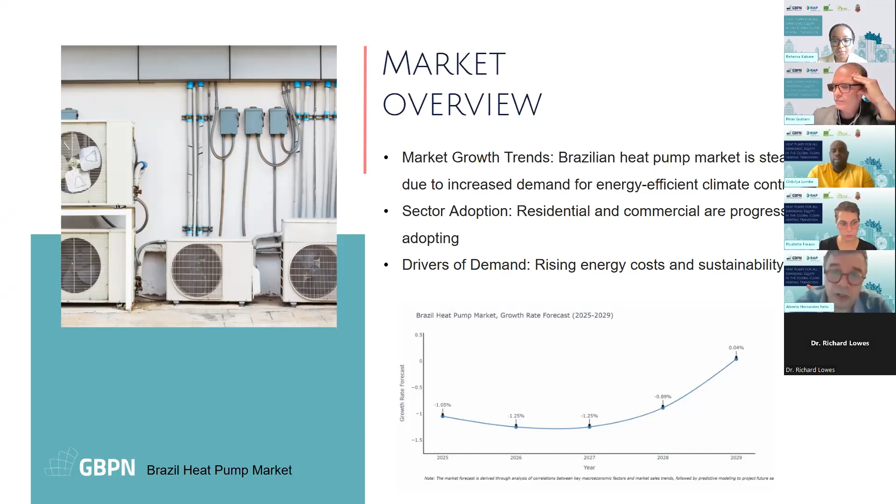We have some financial support that provides interest in applying this kind of technology, especially for energy efficiency. We have low interest loans under a law that makes a program for acceleration of energy transition, started in 2025. Also based on this program, we have some grants and funding programs, which we call green funds, that provide an economic basis for the implementation of energy efficient solutions.

We have some standards being established to incentivize the adoption of heat pumps, especially for water heating. We have a very short history on sustainable certifications here in Brazil—LEED certification is one of the most popular, but we also have an energy efficiency label from the government. So this drive toward more sustainable and efficient buildings is more and more a concern here in Brazil.

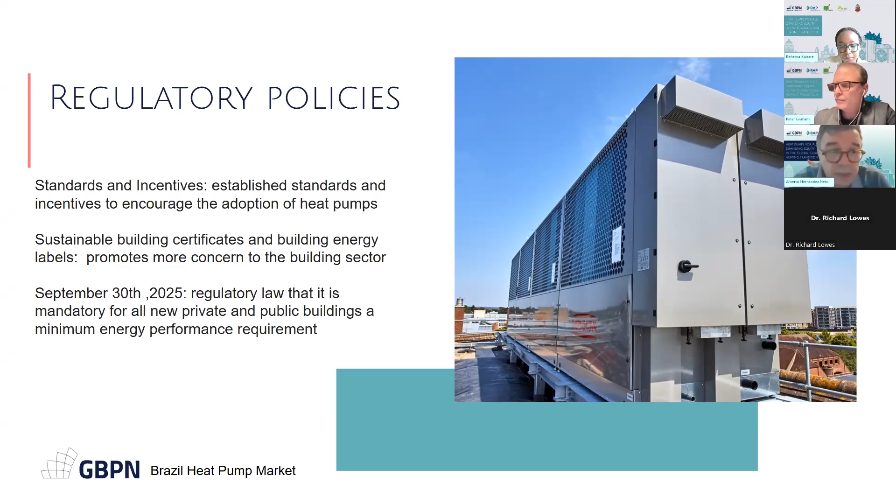As I said, energy labeling is more and more important. We already have energy labeling for equipment—refrigerators, fridges, heat pumps, and also air conditioning. We have performance standards that set minimum requirements for that, and we're also working on education campaigns for consumers, to inform them about the benefits and use of higher energy efficiency equipment. So with a joint force of these laws and campaigns, we expect a more significant increase in the heat pump market in Brazil in the next few years.

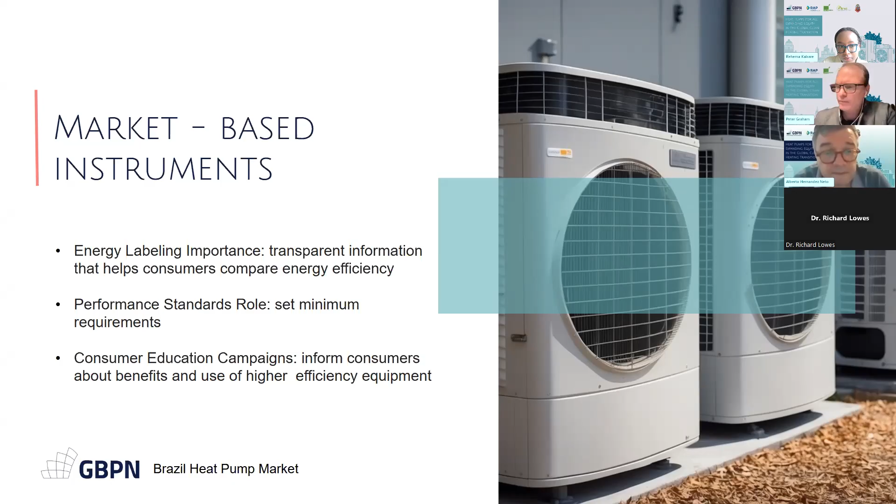So what are the challenges? Especially for residential buildings, the high initial costs here in Brazil is something that we have to deal with.

Still, we import a lot of parts and some equipment, so this is an issue we have to address. We have limited technical expertise, and we lack skilled professionals for implementing such solutions in buildings, so we're still looking for policies to improve technical education in our country.

We have some gaps in infrastructure, especially electrical infrastructure. Some cities have a lot of infrastructure, but Brazil is a huge country with differences from north to south, so we have to deal with a lot of heterogeneity in that.

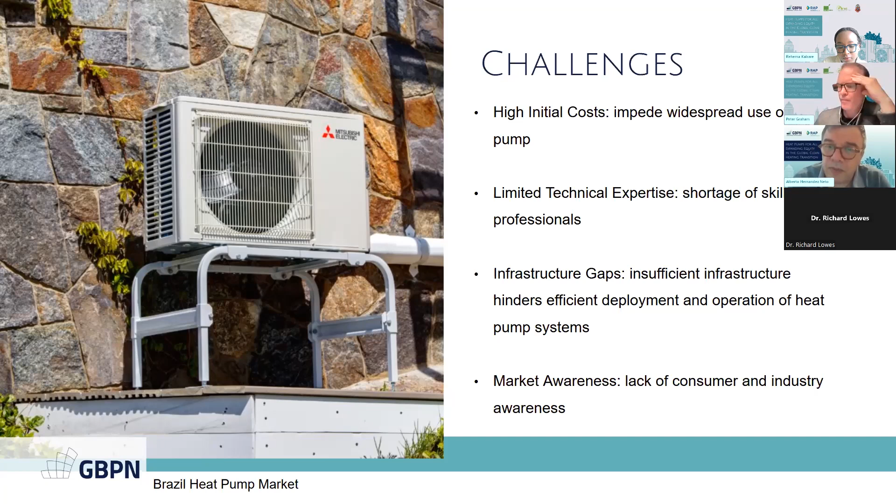And of course, as I said, market awareness. We still have a certain difficulty for the consumer to understand how we can provide, using heat pumps, how to use that in a better way. Next slide, please.

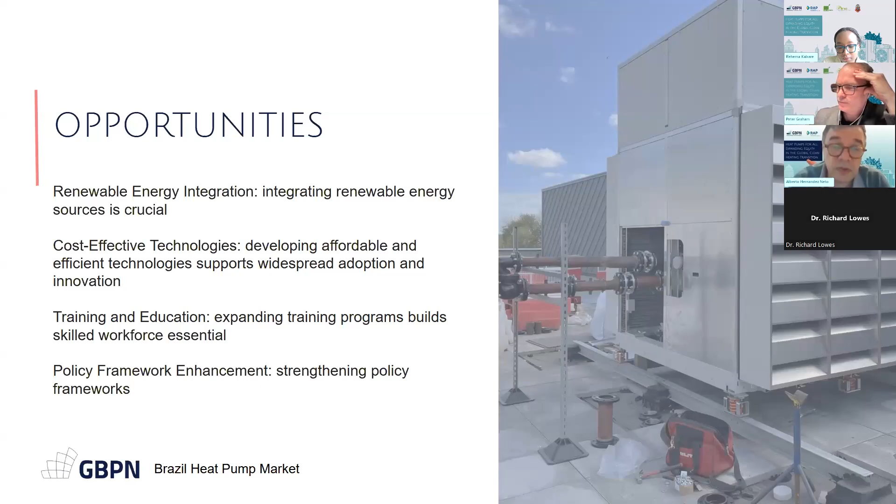So we have, as I said, a lot of opportunities. In Brazil, renewable energy is very important, so we think integrating renewable energy sources is crucial. The idea is to use heat pumps in conjunction with other systems or technologies to make it more cost effective, linking energy demand in a sustainable way.

And of course, we are thinking about innovation and collaboration efforts to overcome some challenges, especially the cost, and on the training of technical people to implement such solutions. So I think I'm done.

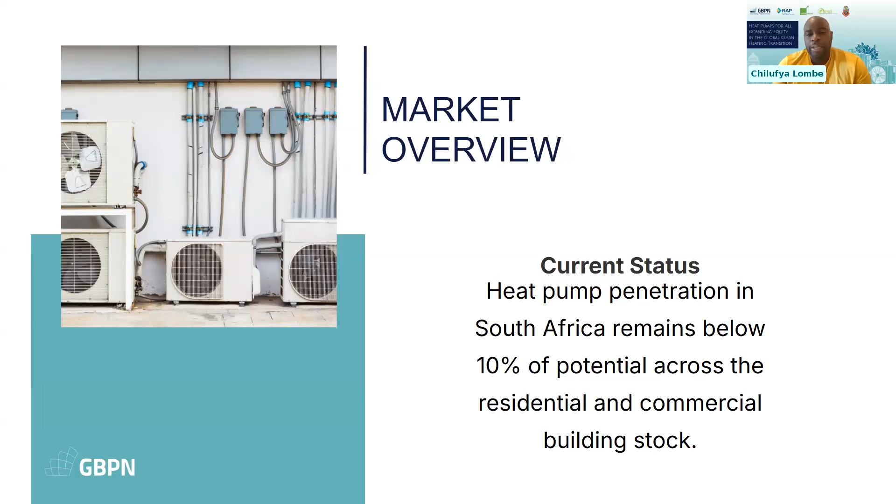In terms of the current status, we know the really useful qualities of heat pumps and how efficient and useful they can be for decarbonization. But South Africa is no different to many emerging markets where there's very low penetration of heat pumps in the market, despite the fact that South Africa has a relatively mature energy efficiency, green building market. Go to the next slide.

In terms of where they should be used, sometimes when we have technical discussions, it's not always clear in our markets where exactly we need to be doing it. In South Africa, residential hot water heating, the bulk of our energy in the residential sector goes to heating hot water. Space heating in commercial buildings is a smaller opportunity because of the climate. I think the real goal or opportunity is in the residential market.

We did a project with the City of Johannesburg a number of years ago looking at the real enablers to having a net zero carbon city, because a number of cities in South Africa have signed up to the C40 challenge that say the cities will be net zero carbon by, I think, 2040. Residential hot water heating was literally the key element — if you could reduce the power or energy needed for residential hot water, you actually make the renewable energy powering your city a lot more of a reality.

So that link between energy efficiency and the ability to make use of renewable energy is very important, and we really see it with the opportunity for heat pumps. If you go to the next slide.

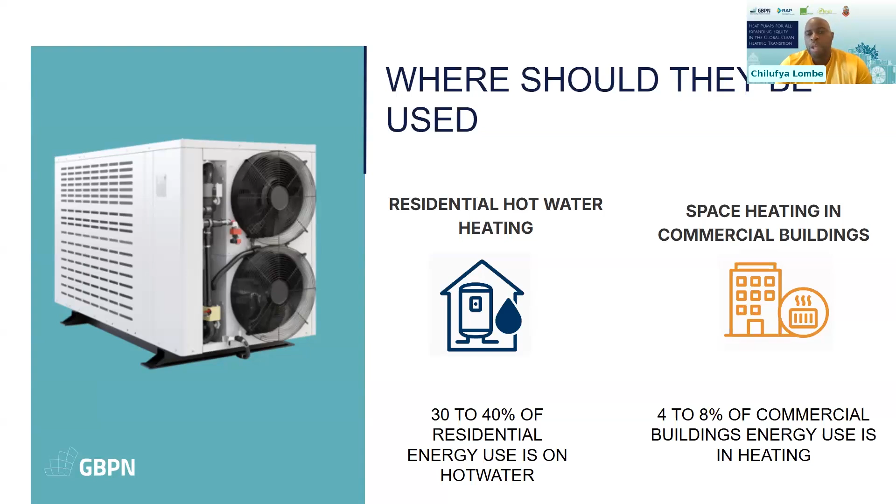So in terms of regulatory policies, South Africa has got really a lot of regulations and codes around energy efficiency and sustainability. But I think it's important to focus on just one, which on paper is supposed to solve at least half of the problem for us.

So there is a law called SANS 10400 XA, which looks at energy efficiency in buildings. This was introduced in 2011, and it basically says that 50% of domestic hot water energy in new buildings should come from essentially non-resistive heating, because the main method of heating hot water in South Africa is resistive heating. I'll show you an example.

There's, however, limited enforcement and understanding of this regulation. What it really tries to say is that the means by which you heat the hot water should be 50% non-resistive. But what has happened in the market is that a lot of people have focused on the source. So you'd put in a resistive heating element to heat your hot water, but then say that 50% of the energy comes from solar panels, which doesn't actually impact the energy use intensity.

This is one of the things that came out of the study, that if we just enforced this law, it would mean that a lot more people would have to actually look at different opportunities. So we often say to our clients that if your house is built after 2011 and it still has the normal standard heating element, then it's technically illegal.

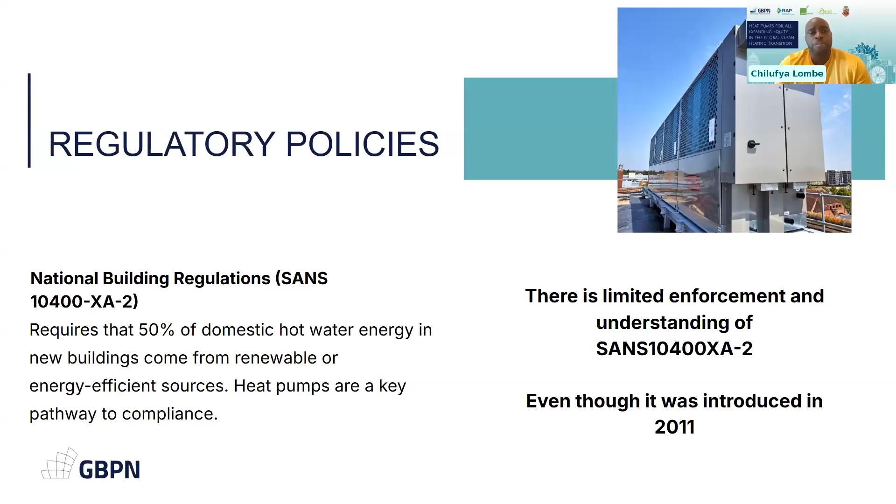In terms of market-based instruments providing financial support, a number of years ago there was quite a lot of rebates around solar water heating, which lasted a couple of years and is no longer there. The main element at the moment that is driving adoption of more energy efficiency is green building certification.

The drivers for that isn't because everybody wants to save the world like most of us, but it's more because there's a lot of funding now available in the country. So IFC, who developed the EDGE certification tool—I think I heard Alberto mention LEED—in a lot of African countries now and emerging markets, EDGE is a certification tool that was developed specifically for the unique conditions in emerging markets.

Because it was developed by IFC, they then linked this funding called the Market Accelerator for Green Construction, or as we like to call it, magic money. Because of that, developers now, if they want access to that funding, need to get EDGE certification. And because it's providing low-cost finance and performance-based incentives for green buildings, that's the one thing we're seeing now that is driving adoption and change within the country.

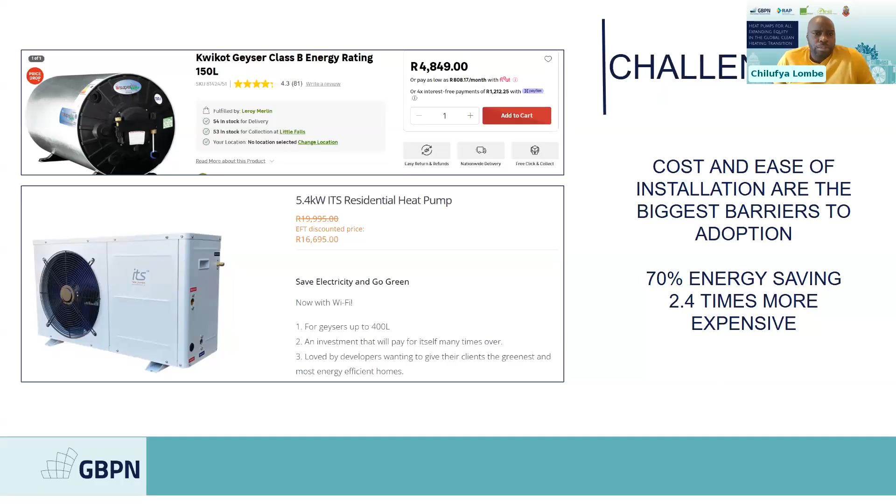Because if you now go to look at solar and heat pump integration, a lot of buildings or clients and even cities in South Africa, everybody wants to be net zero carbon and so on. So if you're reducing energy significantly, you're making it possible to power your building with renewable energy. There's a lot of partnerships and certifications that really promote this.

If your buildings are more efficient - and in South Africa we also have municipal green building policies - all 5 major cities in South Africa have very stringent green building requirements. Technically, any new building coming up in any of these 5 major cities has to be net zero carbon. That's a very, very lofty goal, but then we're still fighting this thing of saying we've got very basic technology for hot water.

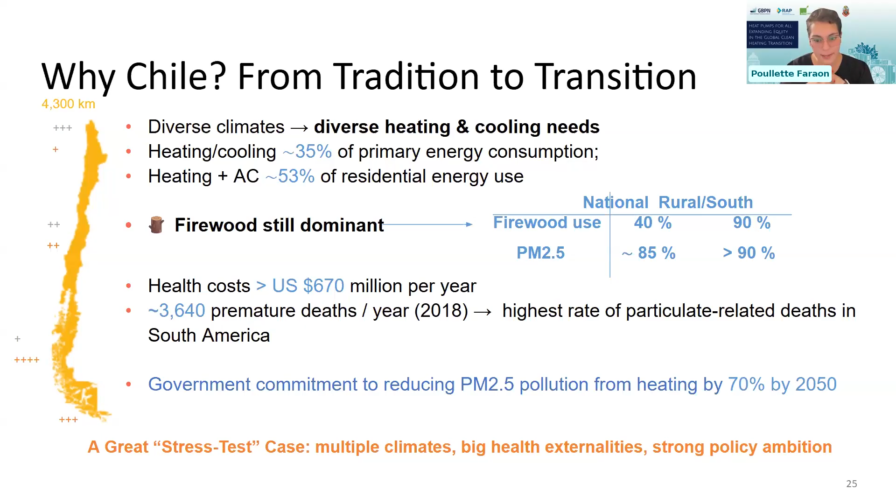In terms of the market overview, Chile is not in incipient stages, but it hasn't grown at the stage they were expecting. The goal is for electrical heating to reach over 56% of houses and 70% of apartments by 2050, becoming the technology of the future for heating and cooling.

The good news is that in Chile, heat pumps are already cost competitive with pellet heaters, which is the most common technology used after firewood. And they can produce between 70 and 76 percent less emissions than other technologies. So the opportunity is huge here.

It has a decent market value of 100 million, and they are expecting steady growth in the years to come due to a lot of policy and regulatory changes. However, still around 70% of households do not have access to heating energy, which is huge in a country like this, and 11% have no access to hot water. So these are, again, very good opportunities for heat pump deployment.

Chile has implemented several things in place in this last decade. The biggest policy, very focused on heating and cooling, is the National Heat and Cold Strategy implemented in 2021. They are aiming to cut greenhouse gas emissions by 65% by 2050, achieve 80% sustainable heating and cooling—mostly meaning electrification—and provide access to more than 75% of households. They also have an energy efficiency law that establishes minimum energy performance standards and labels for HVAC systems.

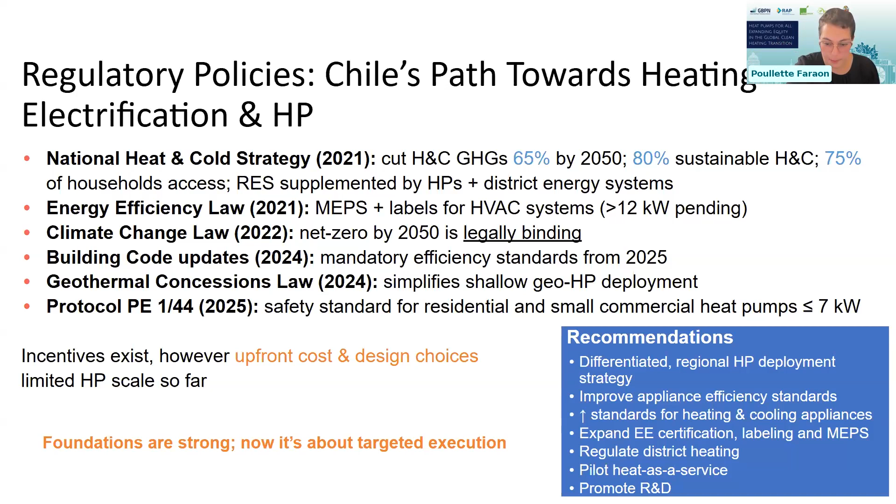However, the upfront costs are still very high, and the design choices of several programs have not been very well targeted, or the results haven't been as expected. From the report that we did, we extracted several recommendations. I'm not going to read all of them, but we can touch on them later.

In terms of financial support as well, Chile has provided a lot of programs, mostly focused on the central and southern regions, which tend to be the most vulnerable cities. For example, they had a heater replacement program that started in 2011.

They had a huge goal of deployment for replacing heaters. However, the technology was not very well focused, and there were a lot of problems. So 10 years after, they only achieved an 18% deployment rate of heater replacement, and most of the ones adopted were pellet technologies. So there was a huge lost opportunity there. No more could be done due to financing difficulties, lack of information, and other things.

They also had a Change Your Heat program that provided between 20-30% tariff discounts for switching to electric heating. Also a winter heating subsidy for vulnerable families, an electricity subsidy for discounts on bills if electric heating was adopted, and other programs including energy efficiency, thermal conditioning, household improvements, etc. There is also a very recent program providing financial support, done by the government and the United Nations program, for industrial heat pump deployment.

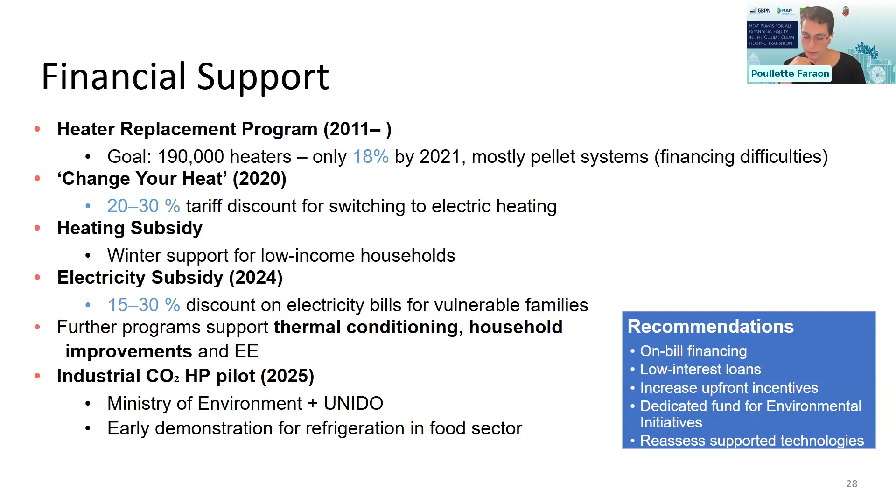And this was only a pilot case for the refrigeration and food sector, but Chile is implementing several things, and they're trying to tackle several aspects in order to implement or foster more electrification in heat pumps. There is also a lot of interesting things that were done in Chile.

Chile was a precursor and at the start of the race, let's say, by implementing carbon tax and green bonds in the region. They were the first country to do it in the region. However, there are a lot of caveats there. They do have a carbon tax, but it is very low. It is only set at $5 per ton of CO2 emissions, which is way lower than the estimated social cost of carbon, which is around 32.5 or something. But the good news is that they are aware they would want to increase this by 35% by 2030.

However, the most pressing barriers in Chile, as in the other jurisdictions that we've seen, is the huge upfront cost. In Chile, a heat pump is over 4 times more expensive than a traditional firewood burner. This is huge. However, the overall lifetime cost of the technology is still cheaper than the other technologies. But this is information that is not shared normally with people, so they just see the upfront cost, and that's too bad.

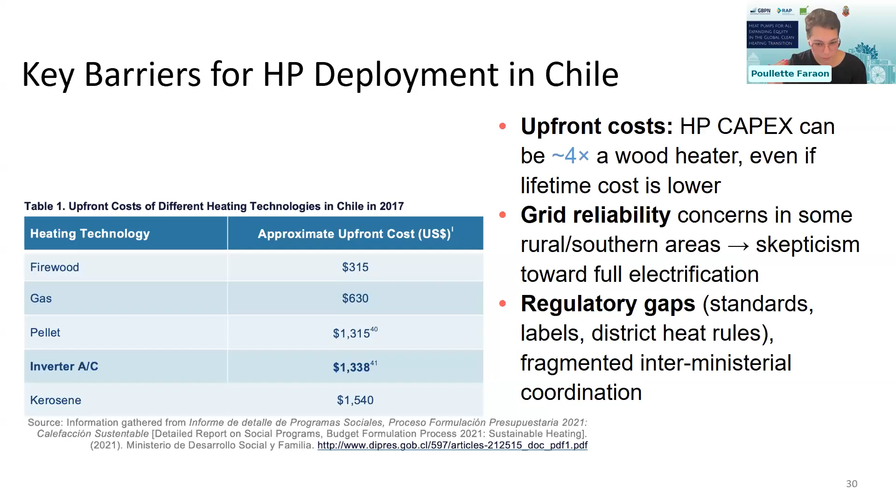Another huge problem is grid reliability. Most of the generation of electricity and the infrastructure is focused in the northern part of the country, and the most vulnerable ones that live in the southern regions, they do not have grid reliability at all. And so this reduces the trust or the confidence into switching into electrification of heating, not only heat pumps, but whatever electrification. So it's a huge cultural disdain of not wanting to willingly shift into other technologies. And there are huge regulatory gaps. Labels, there's a huge room of improvement in there. Next one, please.

And the key recommendations that we found from our report, some of them would be easy to implement: providing on-bill financing mechanisms, for example, to help with these upfront costs, since most beneficiaries would be the consumers that are most vulnerable; provide low-interest loans, as we've seen in other places; foster a differentiated regional rollout, since the country cannot have a national policy of deployment for the whole place because the differences in grid reliability depend on each region. So they could start focusing on very particular regions to start the deployment, raise performance standards and labels and requirements, and of course, increase the cost of carbon and better regulate district heating, and there could be a huge opportunity for heat pumps along with district heating.

And as in the other jurisdictions, just build more communication, more skills, trust, more information, communication between entities as well.

I'm not going to go through this, but if you're curious, we have a very detailed list of recommendations by level of importance, time of implementation that Chile could follow. We highly invite you to read our report. Thank you very much.

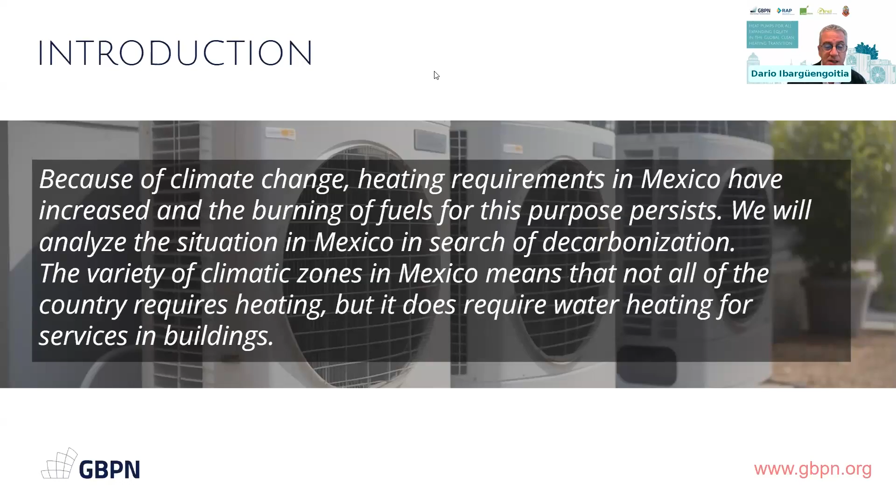Mexico is an interesting market in Latin America. We can think that for the HVAC market, the entire Mexican market is comparable to the market of the state of Texas in the US.

By 2024, this market was $3 billion, with heat pumps being only around 28% of this amount. Due to climate change and promotion of decarbonization of buildings, the heat pump sector is expected to grow more than 8% per year in the coming years, potentially doubling by 2033. This growth is estimated to be driven primarily by the hotel, industrial, and residential sectors, especially with small split systems.

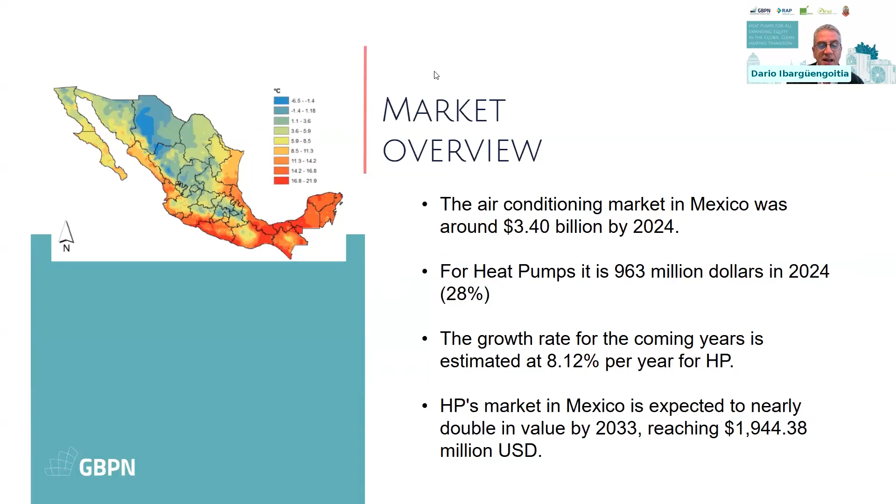Mexico does have certain codes and standards, such as the Mexican Energy Conservation Code for buildings, published in 2016, which is equivalent to the International Energy Conservation Code, and some mandatory standards that establish testing procedures for HVAC equipment efficiency. We are far from having a regulatory framework that applies at the local level in the states and municipalities.

We have official Mexican standards, called NOMs, that attempt to establish minimum efficiencies. These are only for mini-split equipment as well as self-contained equipment. They only cover up to 5-ton capacity, and the equipment efficiency tests only consider cooling mode.

It is important to note that some air conditioning norms have specifically excluded certain types of heat pumps. For example, NOM 23 excludes water-based heat pumps from its scope.

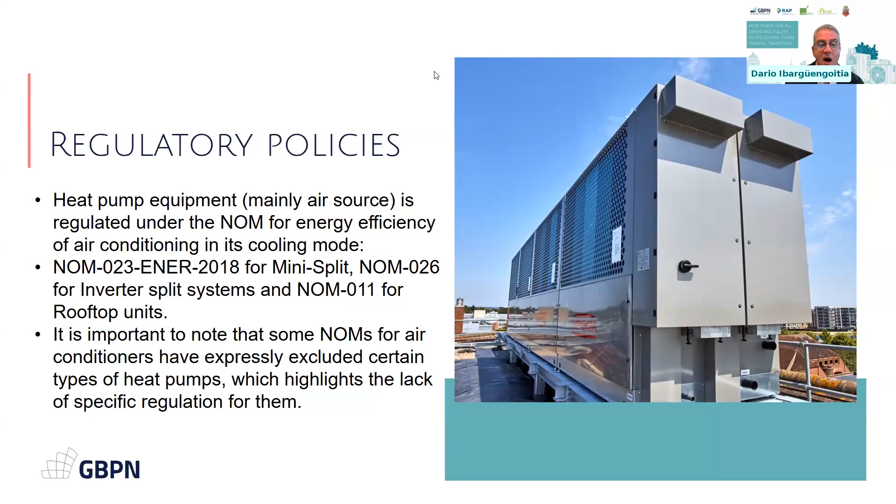Depending on the building sector, we can find some government programs to support financing, mainly indirectly, for the acquisition of more efficient equipment, including heat pumps, but nothing is directly considered for this technology.

There is also the Cooling Action Plan in Mexico, promoted by Semarnat, the Ministry of Environment and Natural Resources, to maximize the benefit of energy efficiency in refrigeration and air conditioning equipment, and promote low global warming potential alternatives. Heat pumps are key to achieving these goals.

Institutions like the National Institute of Electricity and Clean Energy have worked to promote technologies like geothermal heat pumps through demonstration systems. I was just commissioned to work on a specific project to replace the HVAC equipment in a government laboratory building, eliminating fuel combustion for heating.

For the challenge of massive implementation of heat pumps in Mexico, the HVAC industry faces a series of interrelated challenges, covering financial, technical, regulatory, and cultural aspects. The main challenges are economic and financial barriers: the high initial cost and lack of specific incentives.

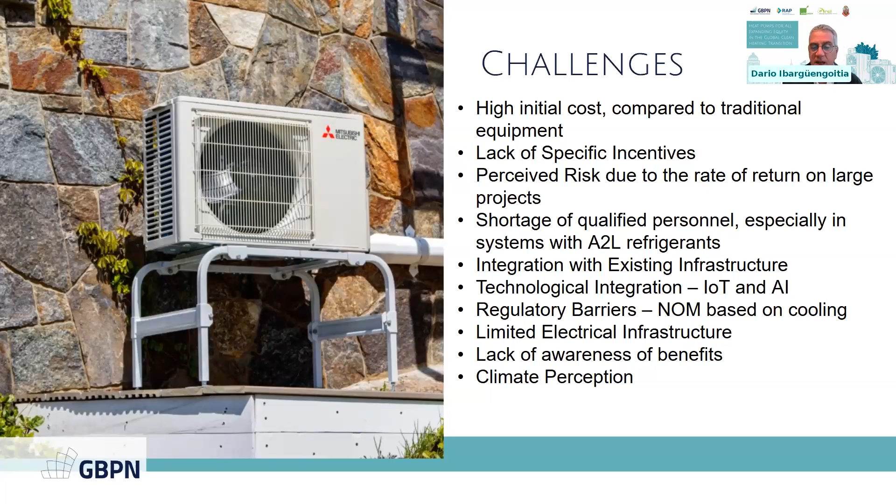Mexico currently has a deficit in electricity generation. There are also cultural and information barriers, and webinars like this one help spread the thinking and change perceptions.

The opportunities to increase the application of heat pumps in the Mexico market are primarily focused on energy efficiency, the demand for sustainable solutions, and the evolution of the construction and industrial markets.

Number one, positioning as an energy efficiency solution: it's really important to take advantage of the significantly lower operation cost of heat pumps compared to conventional systems in Mexico, electrification and decarbonization of buildings.

Mexico has a commitment to energy transition, which opens the door to replacing combustion systems. Capacity building and market niches can help overcome technical barriers through training and specialization. The influence of sustainable construction is also key—the sustainable construction market in Mexico is adopting high-performance international certifications like LEED, EDGE, and pursuing zero carbon emissions certification.

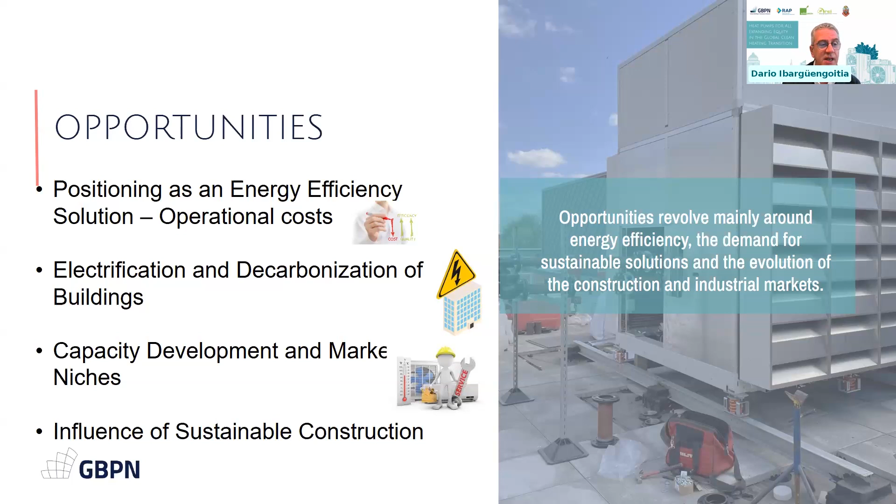Mexico has great potential for growth of heat pump technology, especially in regions where cooling is essential, so that the displaced heat can be utilized for other purposes. Significant promotion and cultural shifts are required on the part of designers, suppliers, and end users to understand the real benefits of heat pumps.

Work is being done with the government to encourage the elimination of fossil fuel combustion in mechanical systems, especially with the implementation of carbon taxes, particularly in the industrial sector, which presents a great opportunity for heat pump technology. Actually, the roadmap for the decarbonization of buildings in Mexico is being developed, and it will be presented next month, promoting electrification, generation of renewable energy, and high efficiency technologies.

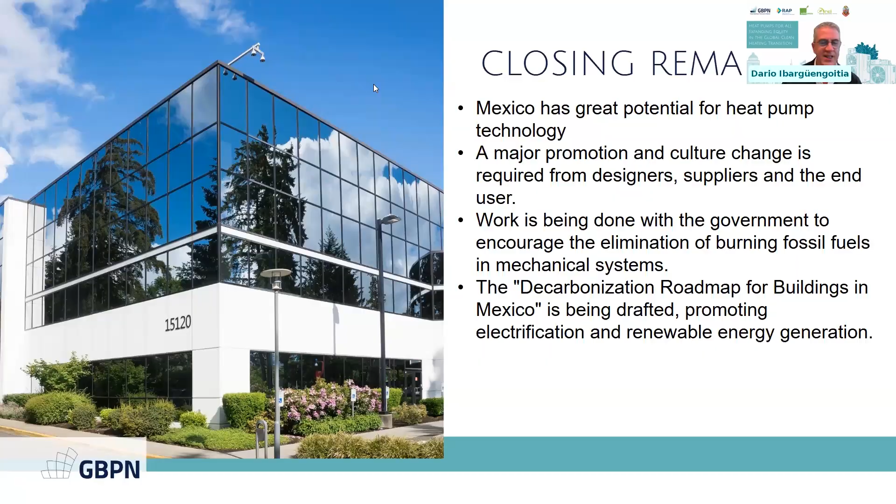There are a number of common themes which are coming through in all of the presentations here, and we have a bit of time for Q&A. Rahema, I was just checking the Q&A box, but there doesn't seem to be any questions posted in the chat.

So if I could take the liberty of asking a general question to each of the panelists, and I wanted to bring Richard back in here as well. From what I've heard across all of our presentations so far, these common barriers keep coming up: high upfront cost, implementation issues at different levels, whether it's the technical capability of installers or the actual implementation of supporting policies. The scale of ambition is high, but perhaps the progress isn't matching the level of ambition right now.